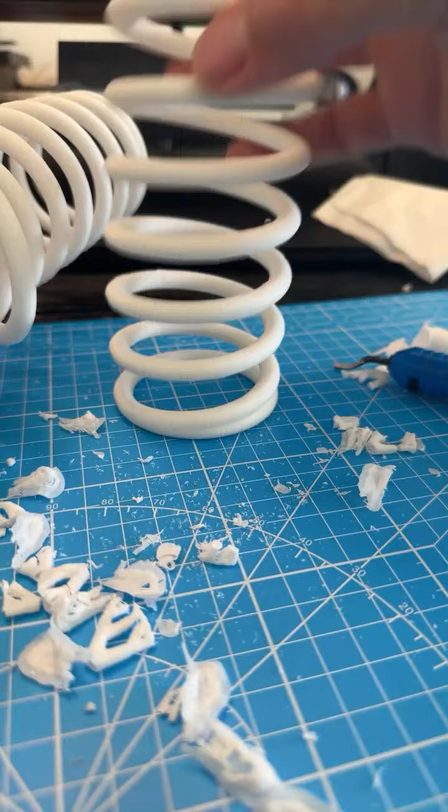It's funny, kind of the springiness of it. You would think being plastic, PLA—this is just basic PLA—you would think that would not allow it to be very springy, or maybe it would crack or break under pressure. But as you can see, well, I'm not going to test this one too much, but you can bend it just like a spring. I don't want to break this one. I actually think this one's a lot stronger than this one, and it probably will not break nearly as easily as this one did.

Yeah, I just got it out of the printer, guys. I don't want to break it yet. So yeah, but it printed out really well, I think. I mean, it's got a lot of burr here still, and I can sit here and grind and sand at it for a little while, and I will. Might do that right now a little bit.

The design's actually quite easy to do if you're not familiar with Onshape. Onshape.com—quite easy to make a design like this on there. Essentially, they've got a tool called a helix, and you can create a helix and then wrap a shape around it. So you're wrapping a circle around it and then you tell it how many turns and how long and what the radius is, and that stuff is quite easy to experiment with. And then what I did at the very end, where it ended, I just rotated that back into itself on either end, and that made it a full design, full spring.

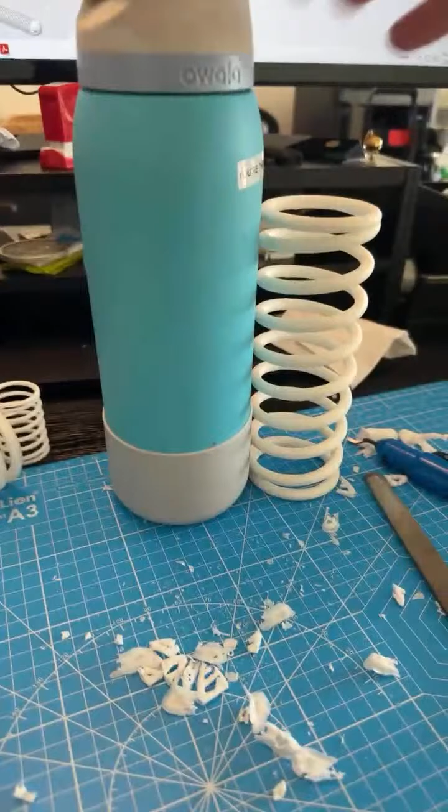Let me see if I can put something of weight on it. So here's my big 40-ounce water bottle. Let me pick up the phone here. Well, obviously that's... look at that. It's holding it up, and the water's full. It's definitely holding it up. And this water bottle full, I'm guessing weighs, I don't know, a few pounds. And you see, it's not collapsing it all the way. And by the way, I'm not holding it in any shape or form. That is so cool.

That's awesome. So yeah, it could definitely be used as a structural part—a functional part is what I'm trying to say. Like a functional spring, it could be used for that. And it's not likely to break in its function. Now it may break if you try to pull it in different directions and whatnot. I would not do that because I did that yesterday with its little cousin here, and that did break. But like I said, with this one, I was actually pulling it apart, and that's when it broke. I don't intend to do that again with this.

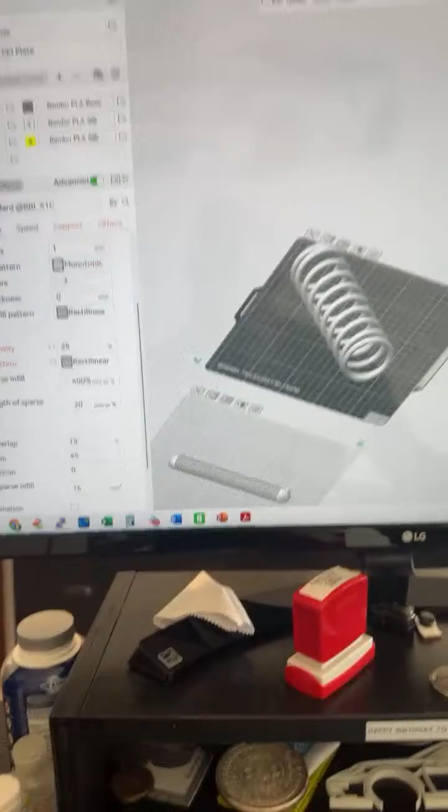So what I did in order to strengthen this—let's see, I made some changes over here. I went from 15 infill to 25, and I went from grid to rectilinear. And if you want to see what difference that makes, we can actually see that in the preview. Hopefully you guys can see that. Here, let's get a little closer.

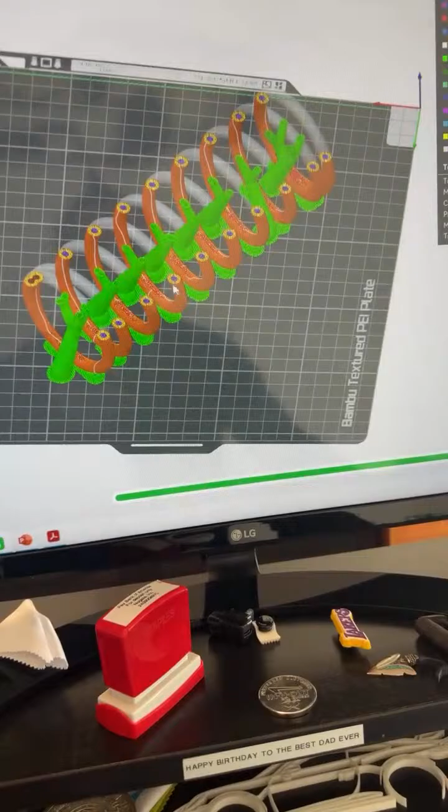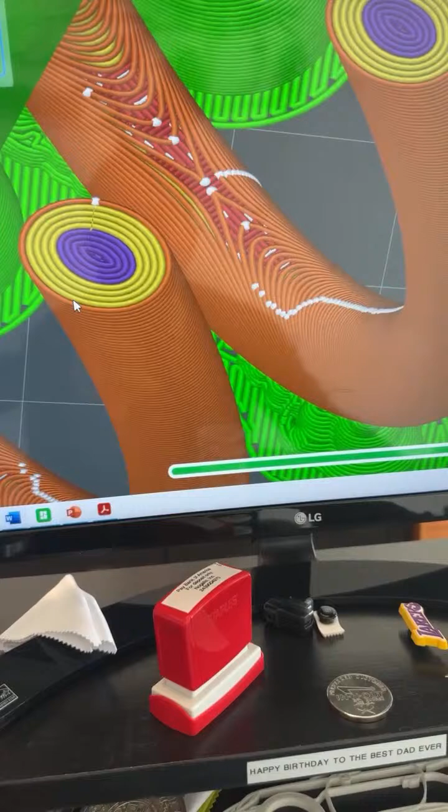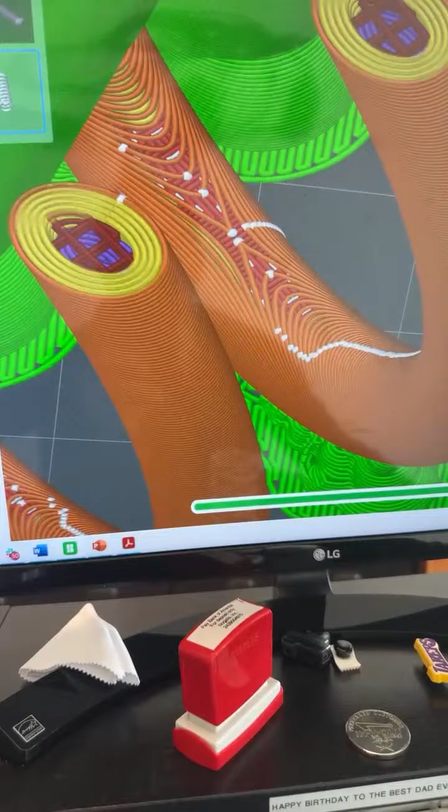That's actually what it's done in order to create that linear support. It's literally filled in every bit of that cavity, which is interesting. I expected to, since this is about 7.5 millimeters wide, I thought that would create some sort of rectilinear shape inside, but it hasn't. Now when you come up into an angle where you'd get more than 7.5 millimeters in a cross section, that's where it has created that rectilinear shape. And then obviously as you come up...

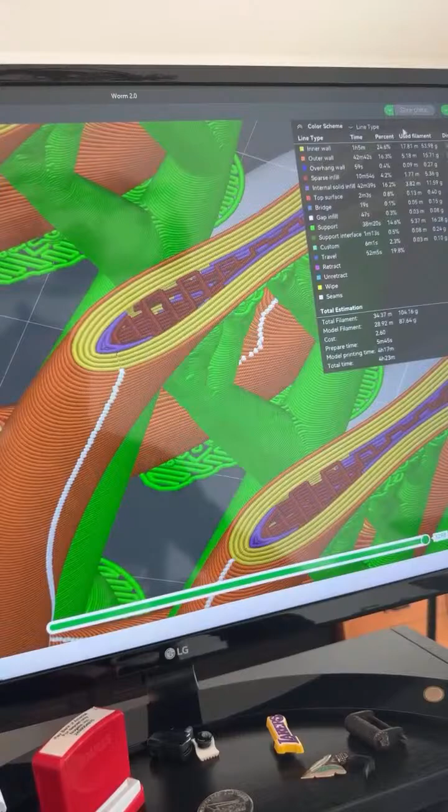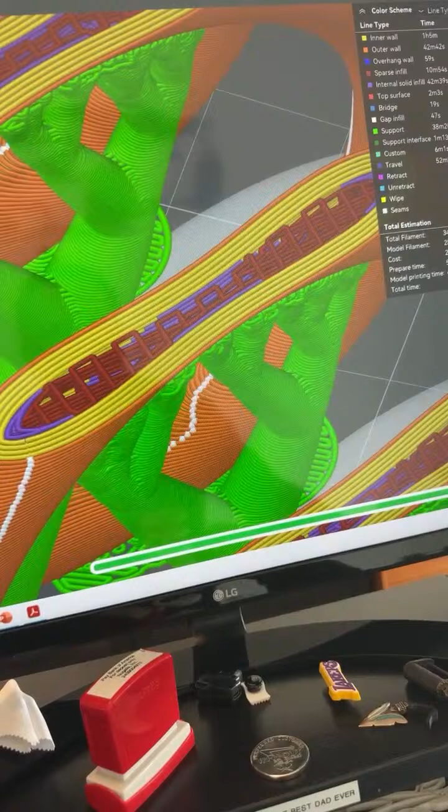In here, this will be a good place to show it. Yeah, so at that very top of the spring, you're definitely able to see that rectilinear shape, and you can tell how strong that's going to be. That's going to be so strong. It's funny how well you can visually judge based on your life experience how strong something will be, and most of the time that's true. But sometimes human intuition will fail you, and you'll think something is very strong when in fact it's not at all strong.

What is really cool is these tree supports that we took off a moment ago. So these are tree supports. If you want to see a really cool tree support, let me go get that for you.

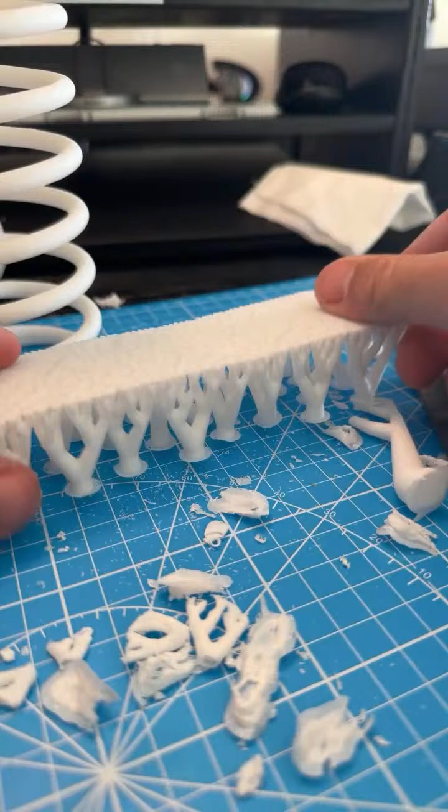Check this out. Check out how cool this tree support is. Again, another Reddit post that people chastise me for. They're like, there is no way you would ever need to create a support that looks like that, it looks like you just printed a box upside down. That's exactly what I did, I printed a box upside down. I didn't do it to get a cool support, but that's what came out of it.

And there's a reason I did that, okay? I'm happy to pull up, if anybody's interested, what the design looks like that necessitated a support that looks like this.

What was cool about it was I think I'm going to try to create some sort of artwork with just support. I think there's something to be said about creating beautiful support - forget the actual part you're printing, print it for the support. I haven't seen anybody do that. I'm not saying nobody has, I'm sure somebody has already done it, but this is like super fun, I think.

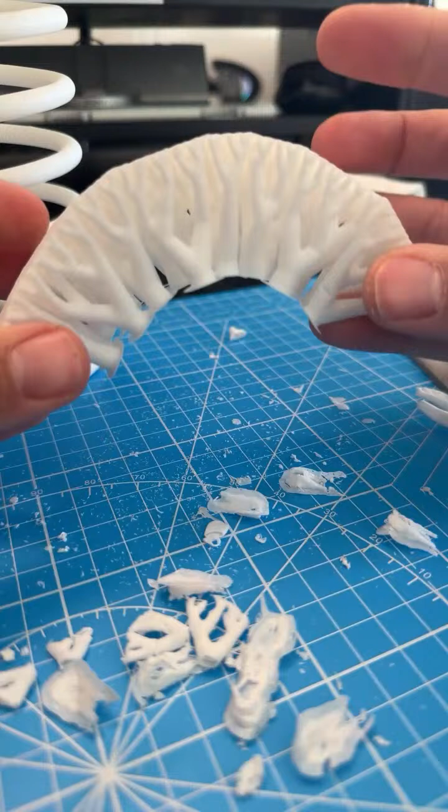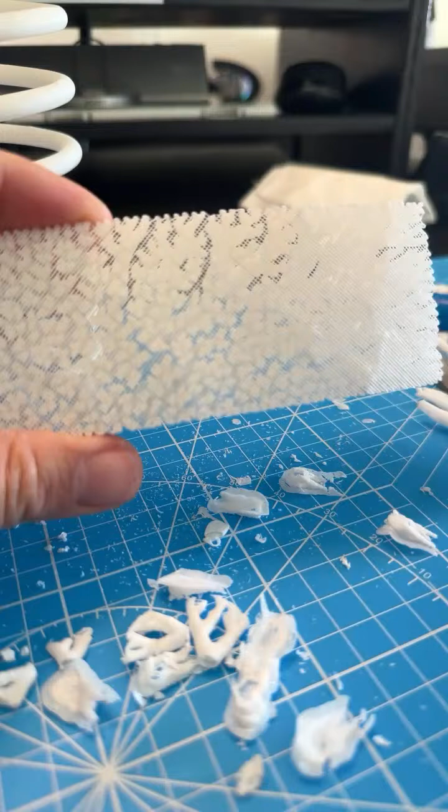And what's cool about it is you can kind of bend it on itself like that, and from the tension on the top, it can support it. And if you look at that top surface - what sucks about live is you can't really focus on anything you're trying to point to - but you see that super fine mesh it lays out on top of the support at the very tip of the tree branches. I think that's really awesome.

What was super satisfying about this is this was obviously against a flat surface, so when I grabbed it, it literally just pulled off all in one piece. That's a pretty tricky thing to get right. I didn't get it right on purpose, it just kind of happened. But I was so happy when it came off like that - it was the most satisfying thing.

And let me clear out some of this mess here. I'm gonna have to vacuum the desk.

But anyway, so this was the spring that I designed last week. Let me see if I can pull up that design.

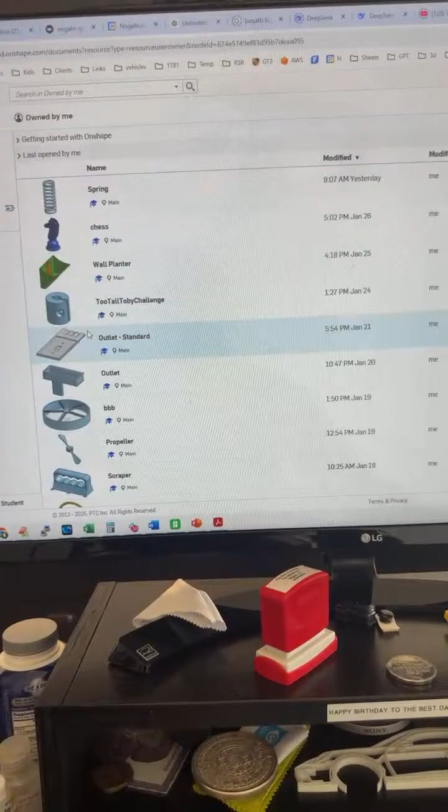So if you haven't been on Onshape, it's a super awesome tool, and totally free, which is amazing. I've created a lot of stuff on here, and I've only been doing this for about a month now. You can see how much stuff I've designed and created, and each one of these things is its own little project with lots and lots of parts. This is a wall planter I'm working on that I could really use some help with. I designed a full chess set - actually not a full one just yet - but this is the spring.

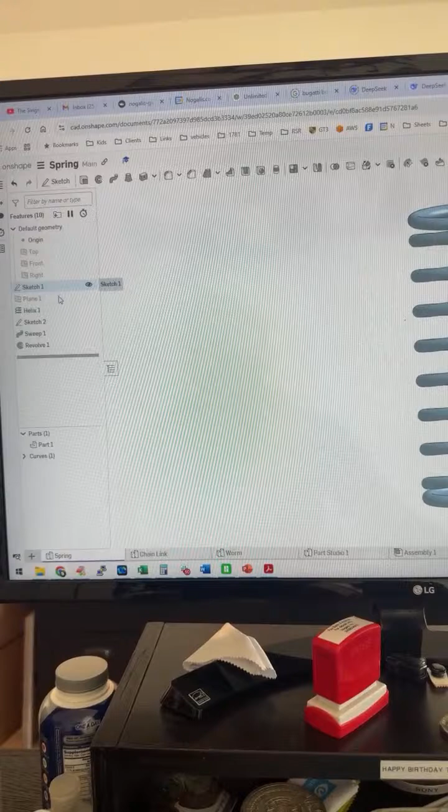So you can kind of see it only took really 1, 2, 3, 4, and 5 steps. That's it. This plane is totally unnecessary. So the way you do this, it's really neat because it allows you to go back to the initial thing you did.

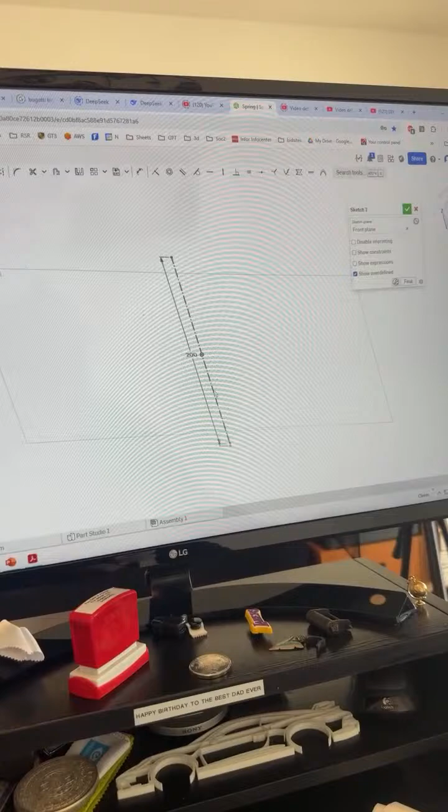So I just created a line for an axis, so that probably wasn't even necessary. That's one step that's not necessary. That plane's not necessary either. So then I created this helix.

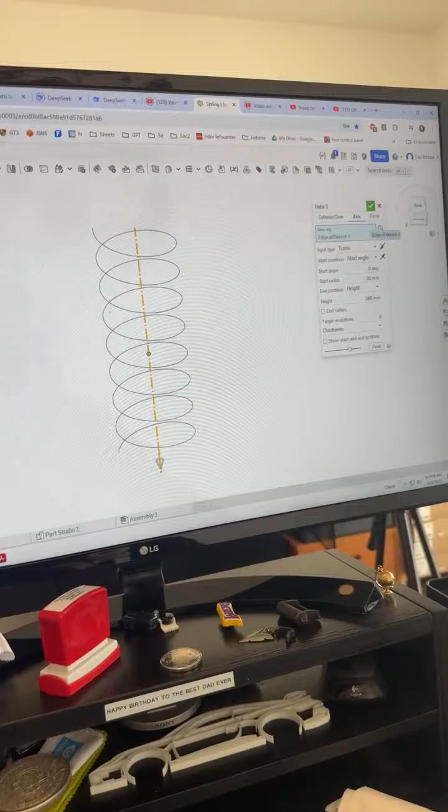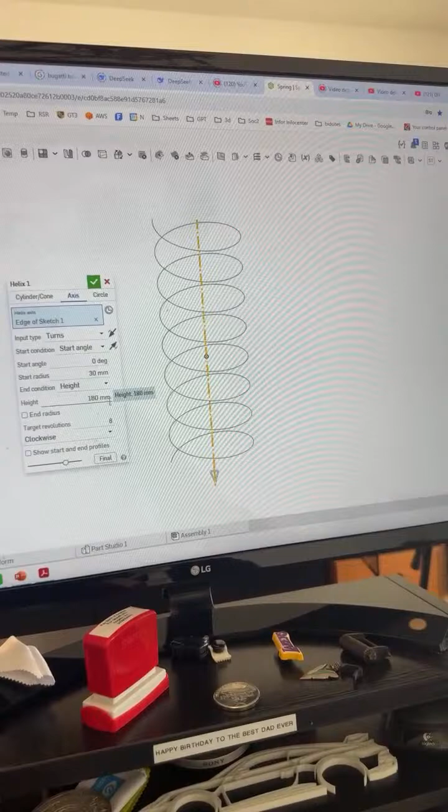So you create this helix, and these are all the settings it takes. Really nothing crazy. You just tell it you want a cylindrical helix, which I could have easily done, but I wanted a little more control. Then you tell it the radius is 30 millimeters and the height is 180 millimeters, and I want that to be a total of 8 revolutions.

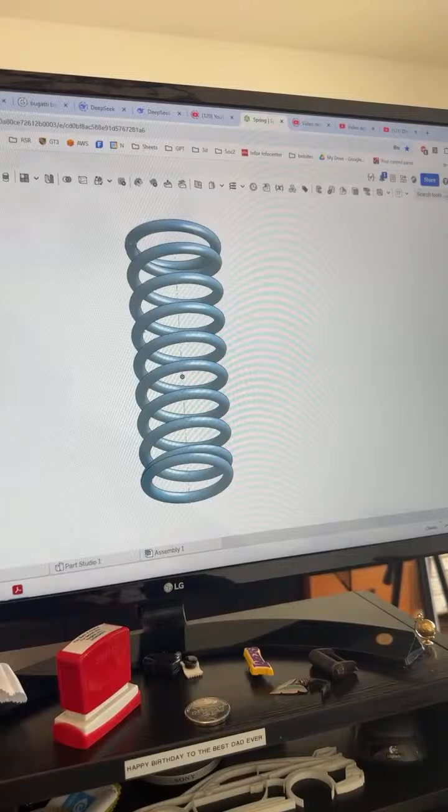So when you tell it that, it creates the spacing. You can change all of that, and you can see the shape changing as I go up and down in there. Then what I did was create this little circle, which is 7.5 millimeters.

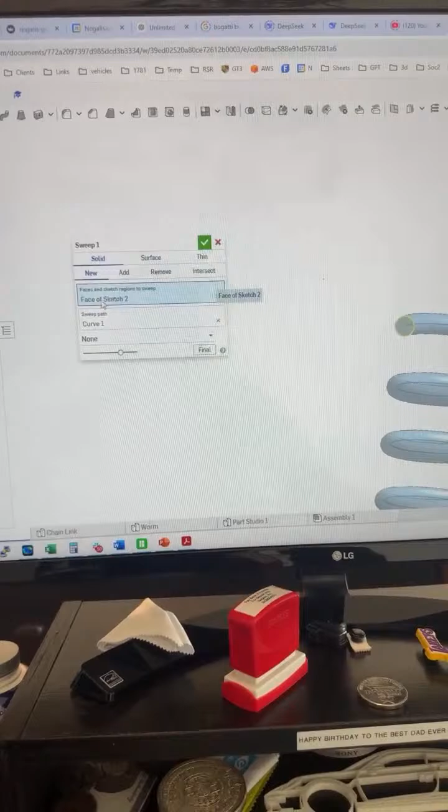And then in this next step, which is called a sweep, I told it I want to sweep that circle around the helix. So the circle, which is face of sketch 2, around the helix, which is curve 1. And then we were pretty much done when we did that.

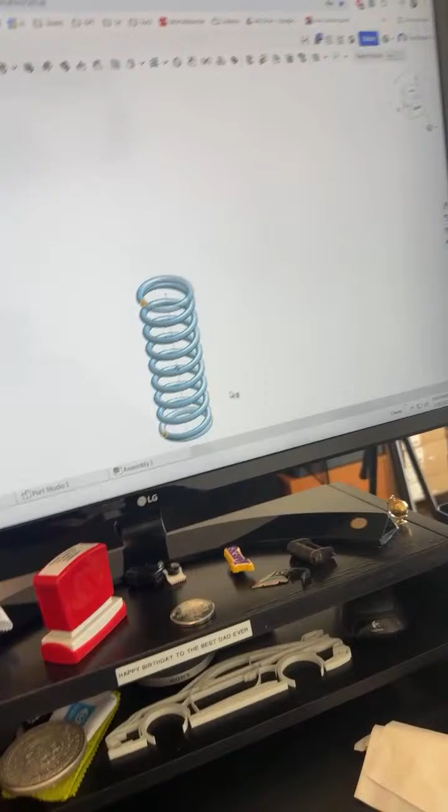The last thing I had to do was tell it to revolve this face and this face around this center axis, that edge of the sketch which is the axis here. Once I did that, you just get a fully functioning spring.

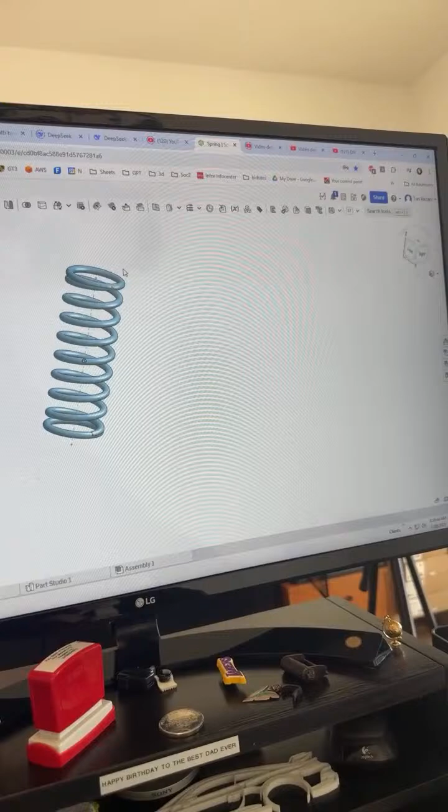That's how long it takes to create a very complex shape like a spring. You don't think a spring is a complex shape, but it really is, because it has a lot of parameters - the thickness, the rotational aspect, the radius itself, the spacing, all of those things. It's a structural part.

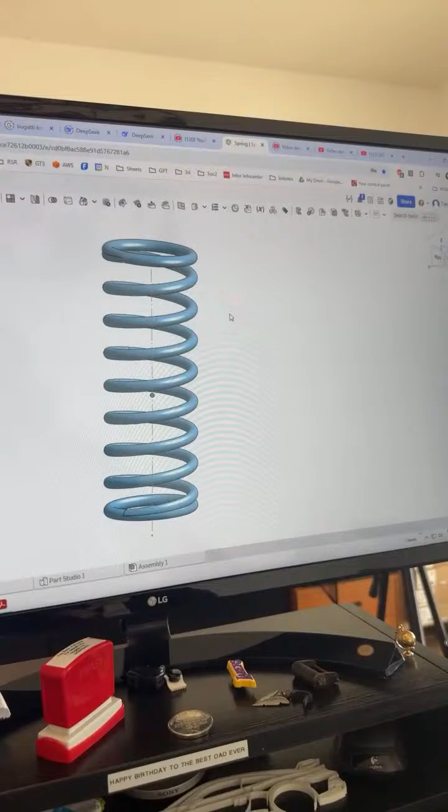If you were to design this without that helix shape, it would probably take you a day. I don't even know how you'd do it, but it's just available to you up in the menu here as helix. Anyway, what it gives you is a super cool spring.

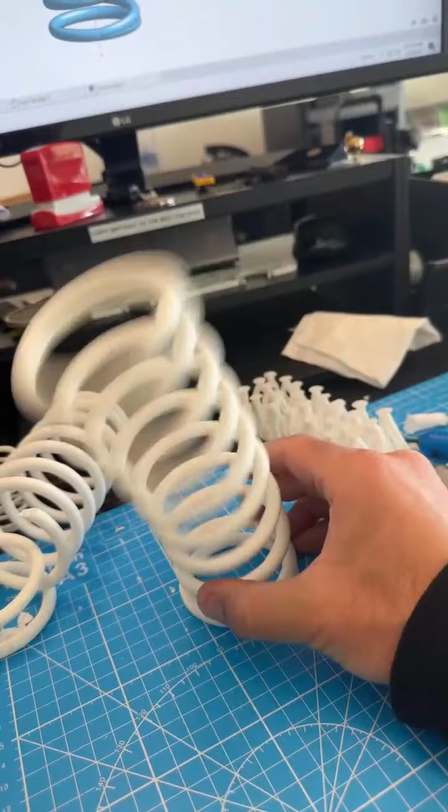I left the camera on all night last night and did a live stream of printing it, and nobody guessed what it was as I was printing. People - it got to the halfway point and it was like, oh, it's a rib cage. No. Because nobody would think you could print a spring on its side like that.

I thought it's just one of the cooler things I think you can print. And it's got a pretty springy feel to it. Again, it's a spring. Yeah, pretty sick.

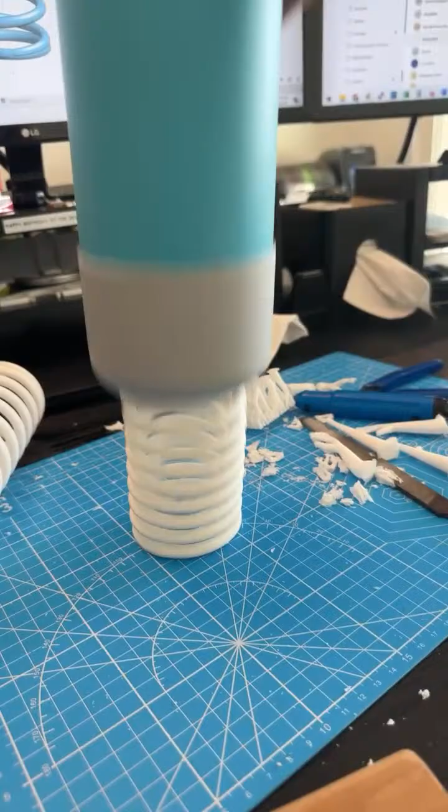Yeah, functionally, I think it's actually nearly perfect. Now, if you wanted to do this really right, what you would do is use support PLA for the supports. I didn't change anything - it was just basically the same PLA used to support. If you use support PLA for the supports, I think you can get this thing looking absolutely perfect without all of these rough edges it has.

The camera will not focus on the edges here. Anyway.

Super cool. Now there is something here though - those Redditors who were saying you can't do this were right in one respect. The spacing between the ribs here has to be large enough for a tree support to be able to exist in between it. So in this case, the tree supports were exactly wide enough to fit underneath on the plane.

Now, if you want a spring that prints like that, that may not be possible with this technique. Well, it's still possible, but you'd really want to use support PLA then, because what would happen is it would start printing the support on the bottom piece, which is a perfectly fine thing to do. I haven't done it here because I don't really like supports starting on my part. But yeah.